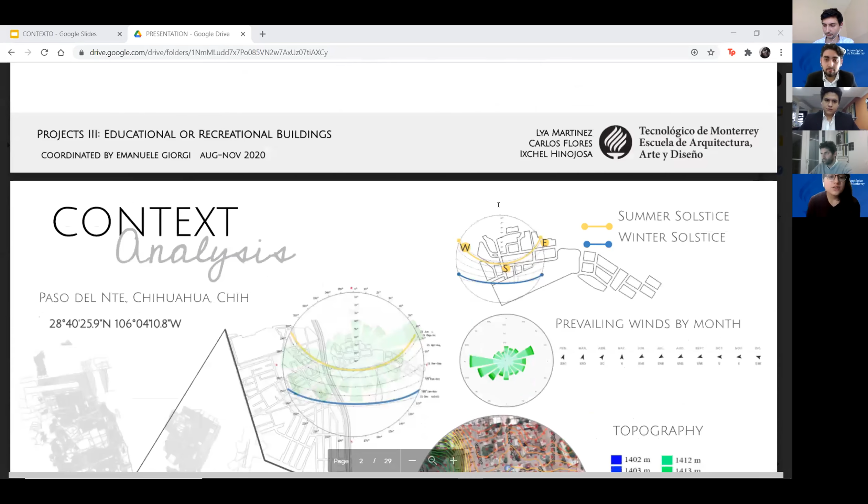The project is situated in the city located in the state of Chihuahua, which is the capital city of the state and the second most populated city. The zone we're working on is next to the Rio Sacramento, which comes from Majalca. It's spread vertically and runs parallel to the road next to the Paso del Norte. Paso del Norte is the sector we're analyzing, where the community center is going to be located.

The city of Chihuahua has main temperatures of 31 centigrade at the highest and 18 at the lowest. The prevailing winds are 17 kilometers per hour, coming from north-southwest. The topography is irregular.

It's situated in a valley next to the Cuencas de Sacramento. The most important aspect of the topography is that the sector is located in irregular topography, in a decline zone. It has approximately 30 meters from the lowest point to the highest point, where the road next to the Rio Sacramento breaks the city into the mountain sector.

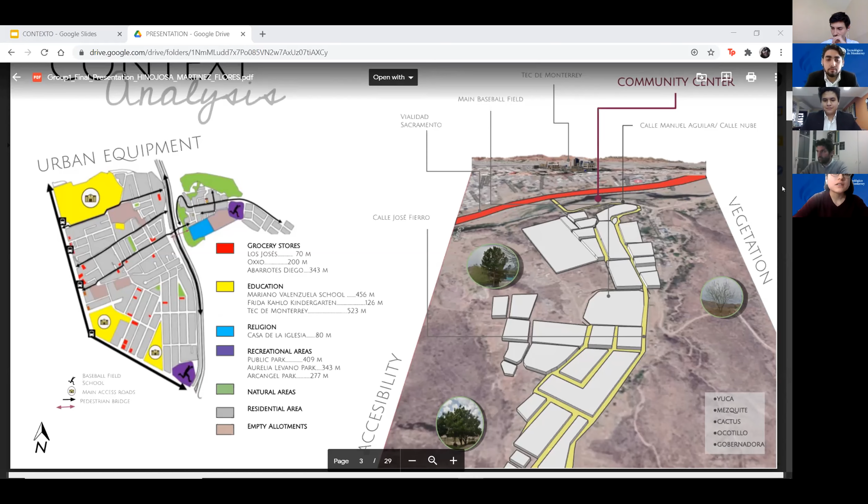We don't have many public spaces, and the one we have, the baseball field, is not very well maintained. It's located in the northern part, where the community center is going to be located.

The social composition: we have about 380 people living in the analysis area, which is bigger than what I stated before, because it's not formally delimited by the government, as it has been growing outside the boundaries of the registered census.

The average age of the people living there is 26 years. The average schooling years are 11. The main activity in the sector is commerce, with about 240 establishments in the sector.

The main work area is industry, Ciudad Chihuahua, mostly maquiladora workforce.

One of the things we found in the social composition is that we could define the sector as in a state of marginality, meaning it's basically excluded from the formal real estate and labor markets. So the houses there are not regulated by formal real estate, and the activities there are also not regulated by the state.

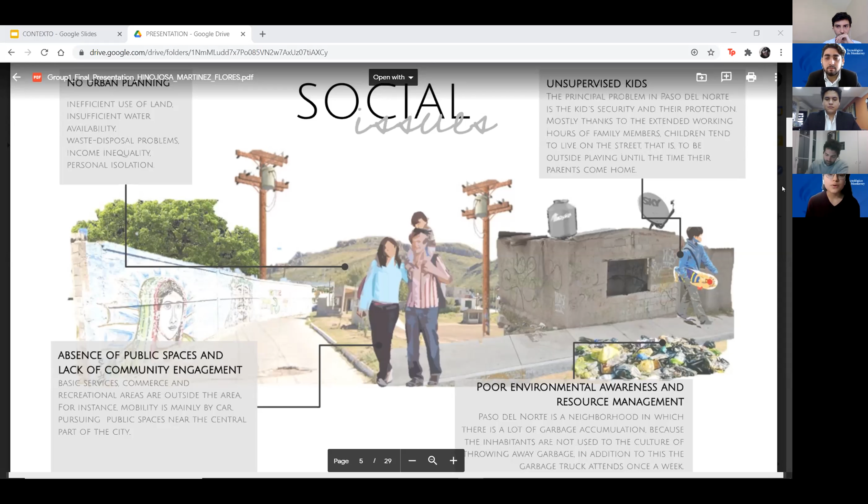There are also unsupervised kids. Mainly the people living there have jobs with extensive hours, and the kids left at home tend to be alone. So there's very poor security related to the kids in the streets or recreational zones.

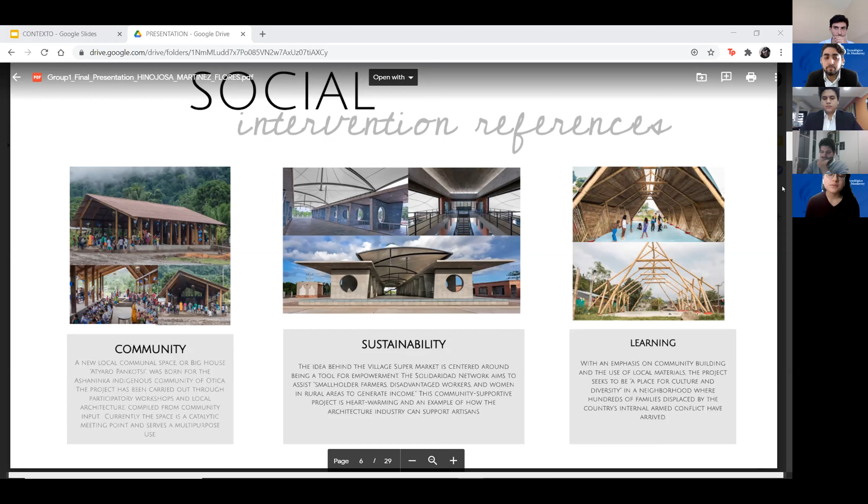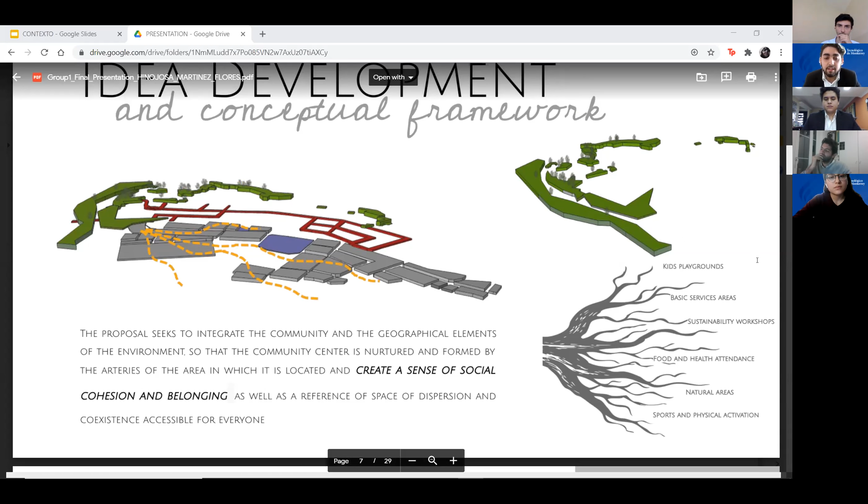Radices is our project's name. Its meaning is that in a figurative sense, the root or roots are spoken of as the idiosyncratic origin of an individual or a community.

Our concept words for our project are peaceful cohabitation, security, simplicity, green areas, harmony, open, friendly, natural, and colors.

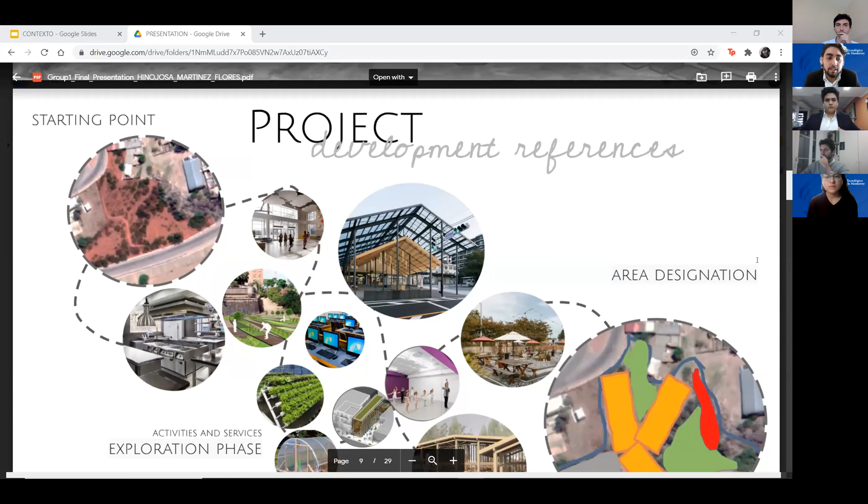Then we started designing by analyzing our terrain, our site, and what the community needed. Then we moved on to the exploration phase, where we experimented with the vegetation and materials that the community feels comfortable with and identifies with. Finally, we moved on to our design.

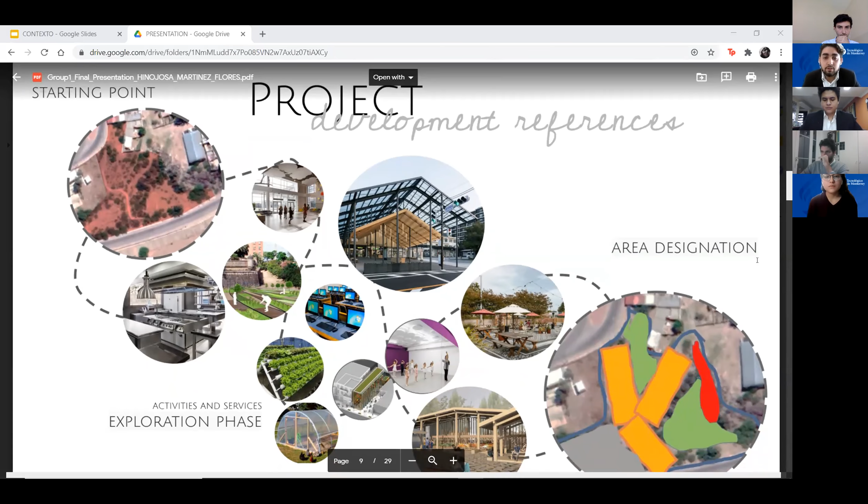What is the key of our project? We tell you that it is simplicity. We created 3 volumes that connect at a central point. The volumes were adapted to the terrain and assigned different uses.

Here we can see the green volume. There are the classrooms where kids could be learning, and here we have the workshops, the dance room, the music room, the computer room. It's like the learning building.

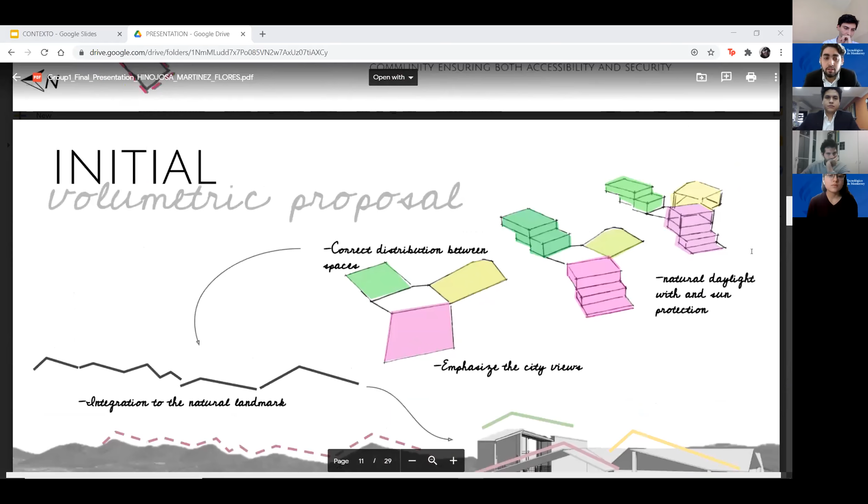Our initial volumetric proposal focused on different concepts, like the integration of the natural landmark, the city views, and the natural lighting. The project gets natural light. Here we can see an idea of the views to the city and our project.

We designed Radices to be an open space, a project that has relation with the environment and our green areas. Radices is composed of 2 buildings and 1 esplanade: one is the marketplace, the other is our educational building, and the events area, which corresponds to the esplanade.

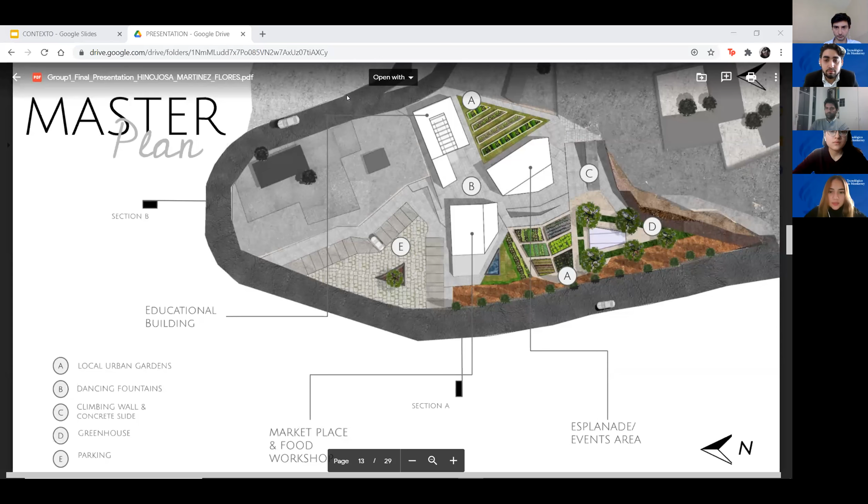In the second level, we find the workshops designed to be a creative space where the community can sew, paint, or cook, which is why it's a spacious area. In the middle we have sinks and complements like storage at the end of this floor. We also have a climbing wall at the side of our project.

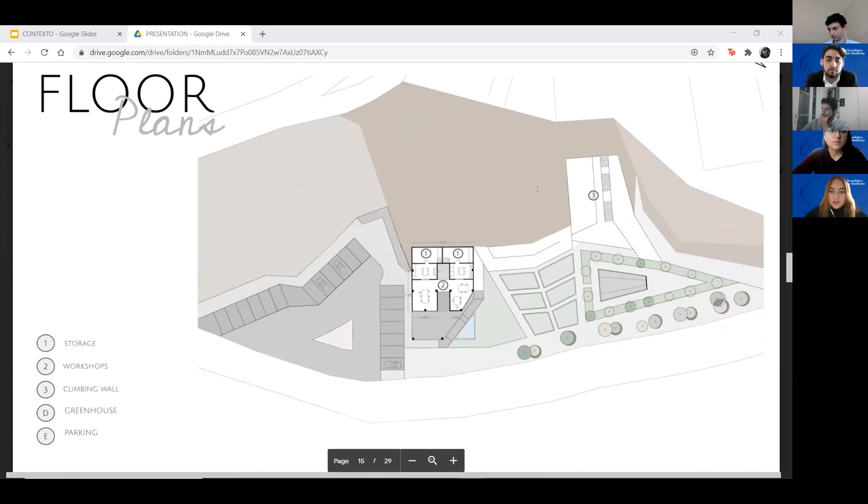In the third level, we can see the last level of the marketplace, where the community can sell or show what they made in the workshop. Therefore, it's an open area too. The third level is the most important level of Radices, because it's the union of all the project, where everything happens.

In this level, we have access to our 3 main areas. We can see the first level of the educational building, an open space that invites people to relax, and also the esplanade, which is especially thought for events, an open and spacious area that everyone in the community is allowed to use. In the fourth level, we can find the restrooms and a lending library of the educational building.

And the fifth level, we find the last floor of the educational building. That is the most important level of this building because of the classrooms designed to be a concentration space. In this level, we also have the main access from the Manuel Aguilar Street, the principal street of the community.

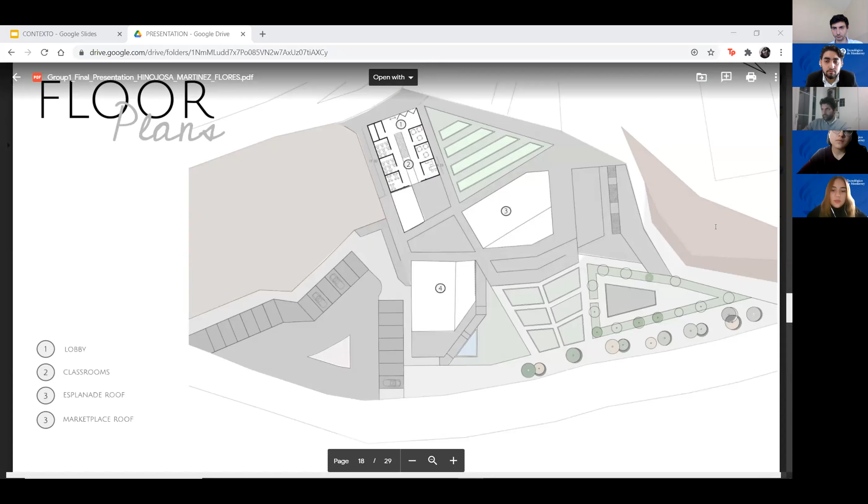Here we have the detailed plans of the three main areas. This one is of the marketplace. The next one is of the educational building, the 3 levels. And the last one is the esplanade.

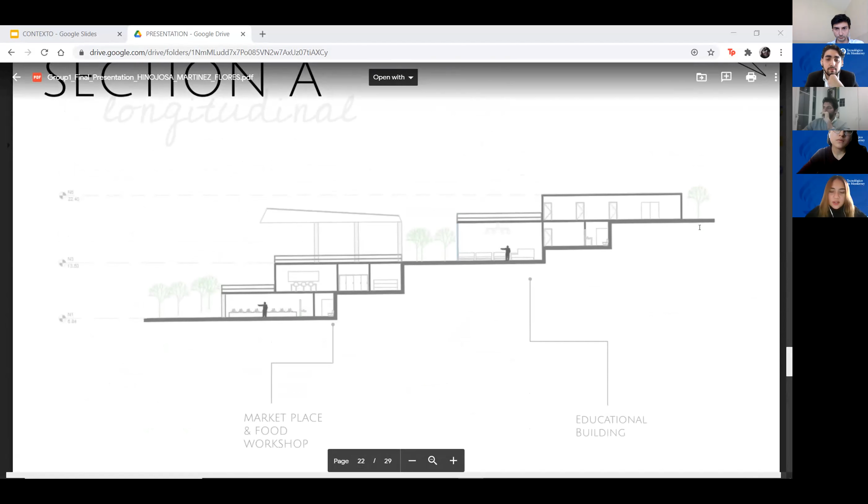Next, please. In this section, we have information of the marketplace and the educational building. As you can see, there are some similarities on the design of the levels. They both have a terrace, which is an important feature of Radices. And here we can see the level that connects both, that is the 3rd level.

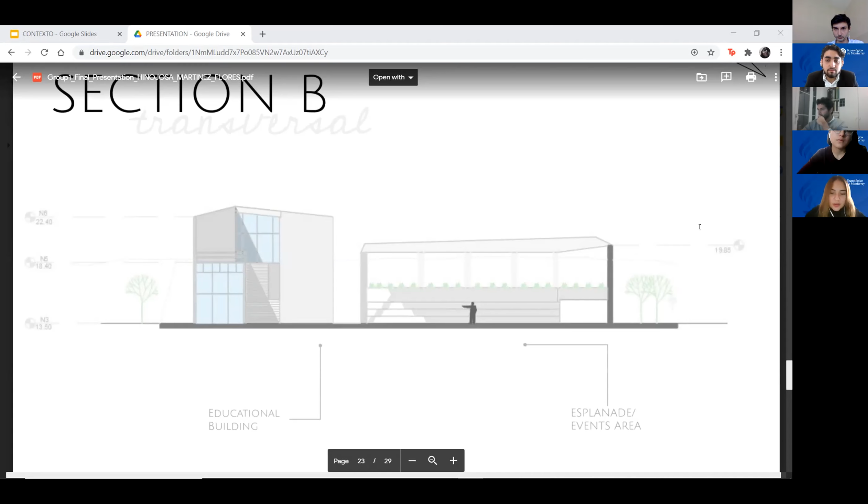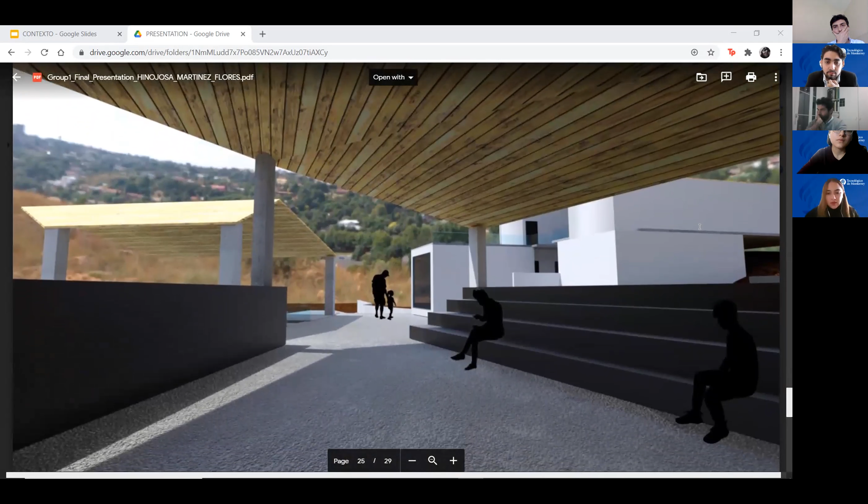Here is the esplanade, the educational building, and the marketplace. And we have the front view of our project.

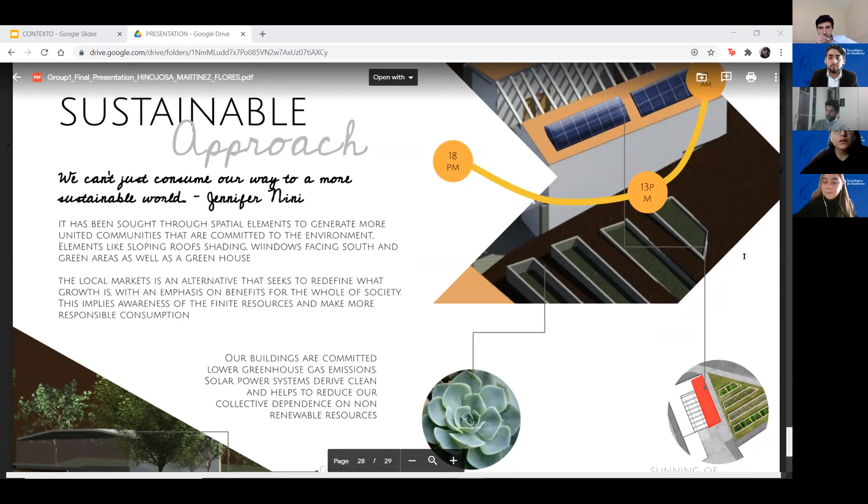And last, our sustainable approach. We based our project in the sustainability of circular commerce, so you can grow your own fruits or vegetables in the urban market and the urban growth, and then sell it at the market. We implemented solar panels and a greenhouse. All the plants we want to implement are endemic and useful to the community. We have sloping roofs, shading, and windows facing south, as well as a lot of green areas.

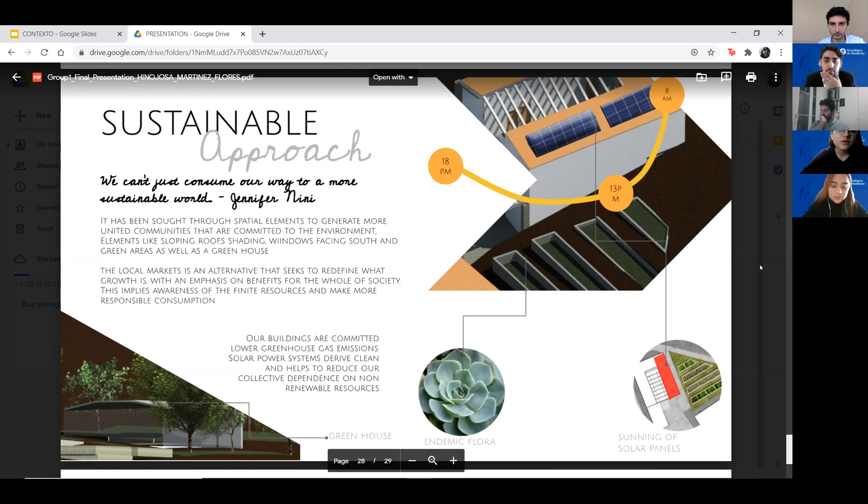Thank you. Okay, thank you. You spoke too much because we are at 18 minutes, but okay. I'm sorry, it's the nerves of being the first one.

Agustin, Giorgio, do you have any question for this group, or we can go to the second group?

Just very quick, I think — if I'm not wrong, all the projects are in the same site or different sites? All in the same site, same community. Okay, so all the introduction of the natural elements like the sun and wind and these kinds of things, maybe we can go quicker in the next presentations, since we don't need to hear it again six times. Definitely. Yeah, okay, that's good.

Perfect, so we can go to the second group, or any other comments? Okay.

Just a suggestion: I'd try to work better with the cover of the building, with the landscape and the city. So not this flat roof, but maybe you can work with another type of this cover — the roof. Understand? Do you want to reply? So just a suggestion about the cover of the building. Maybe work better with the shape of this roof, to give more connection between the building and the landscape, the building and the city, the building and the public space. Because it's not a simple shape of roof that could work better with this type of project. So you mean the roof could be used better, like extending the public space, so you can access these roofs instead of having the pitch roof typology — not a simple roof, but maybe a shape that connects better the landscape, the building, and the public space. Just a suggestion.

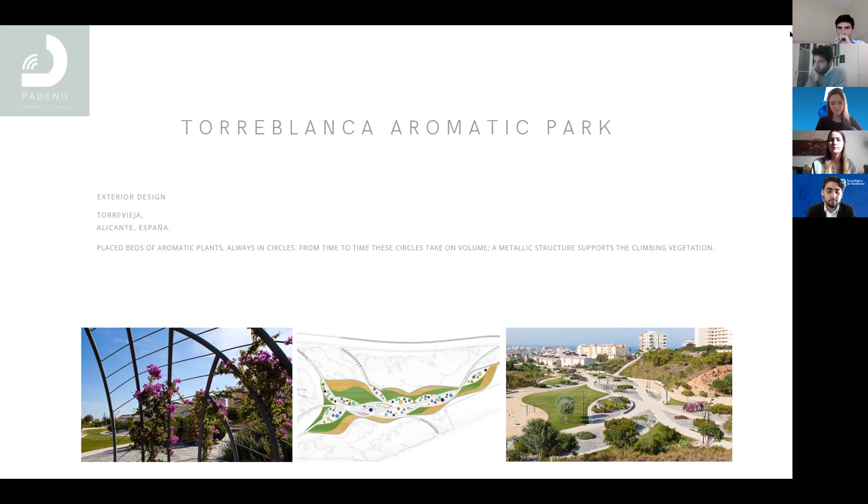Next, we're going to talk about permaculture. It is a practical method of creating sustainable ways of living - a conscious design and maintenance of agriculturally productive ecosystems.

In this community, we have to accomplish the following specifications: low maintenance, full sun exposure, and low and occasional watering.

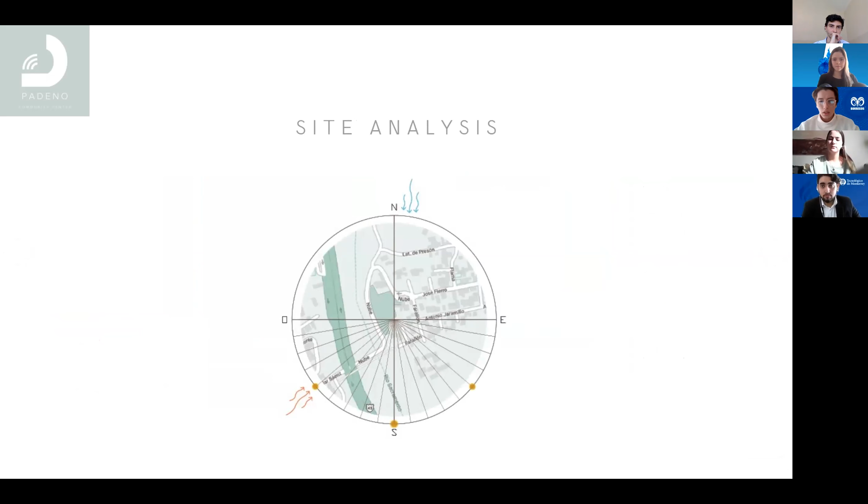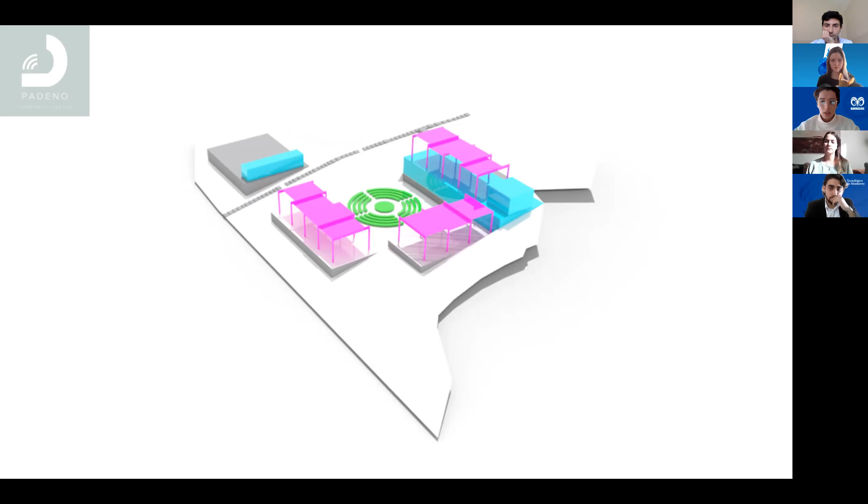Next, now we have the diagrams for the ceilings. What we wanted to achieve is a space that can change according to the needs of the community, the time, and the budget. So we proposed these roofs in which the community can create movable spaces according to their activities.

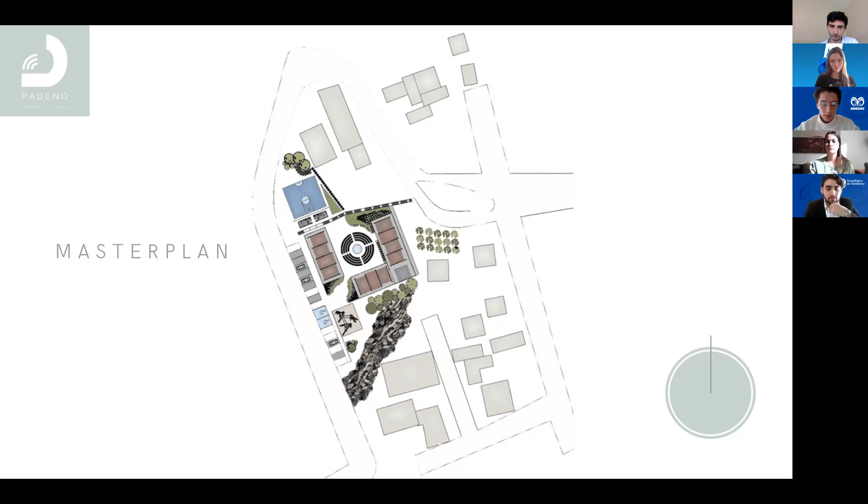Then we have the floor plan, where we can see the distribution of the proposed spaces. First, in the center of the site, we have the production area. Around it, we have the library, computer center, and cafeteria. Then an esplanade with the first roof, where they can make these movable spaces. Then we have a playground, another roof, and some bathrooms and a sport court. On the right side, we have trees also for production.

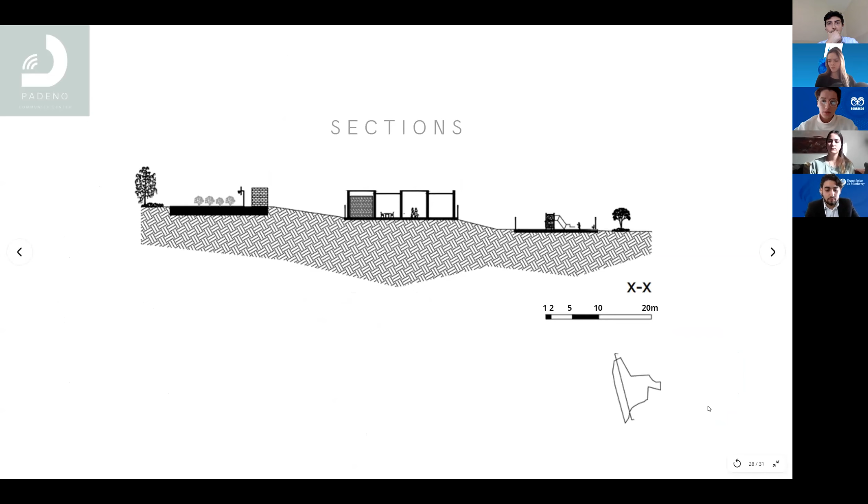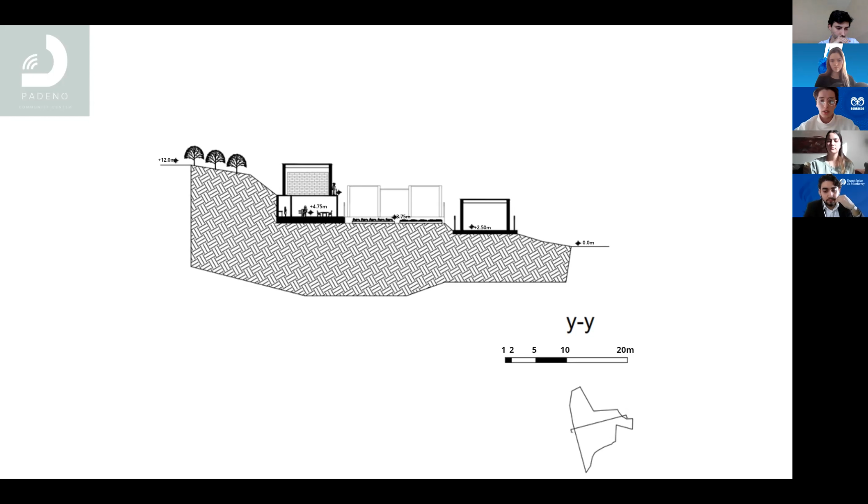Next, we have the sections where we can observe the topography and the levels of the spaces, which were one of our biggest challenges. Here we can also see how above the cafeteria we have a terrace and some restrooms, from which we can get a view of the whole city.

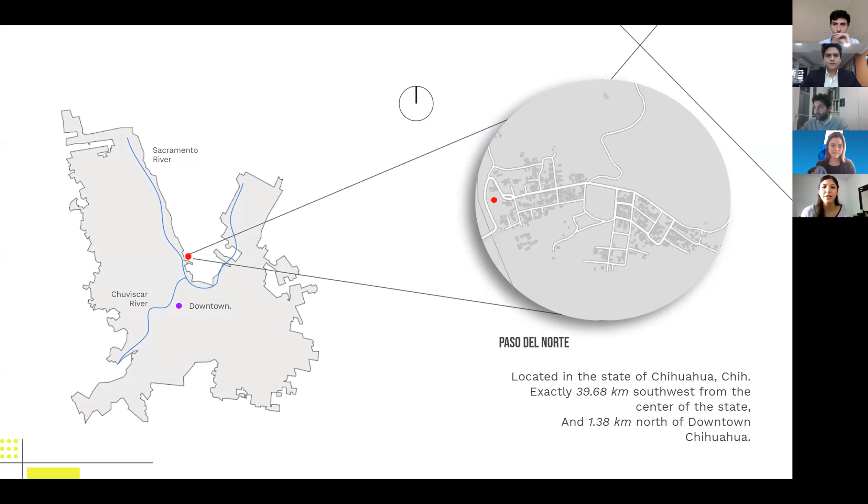The site is located in the city of Chihuahua, Chihuahua, in the neighborhood of El Paso del Norte, where the Sacramento River passes nearby. This community is also about 1.38 kilometers north of downtown, which is near the Chuviscar River.

On the left, there are some stairs that were built before the bridge, and they are still being used by some people in the community. On the other side is the pedestrian bridge, which is 146 meters long, that can be difficult to climb due to the rise of the stairs.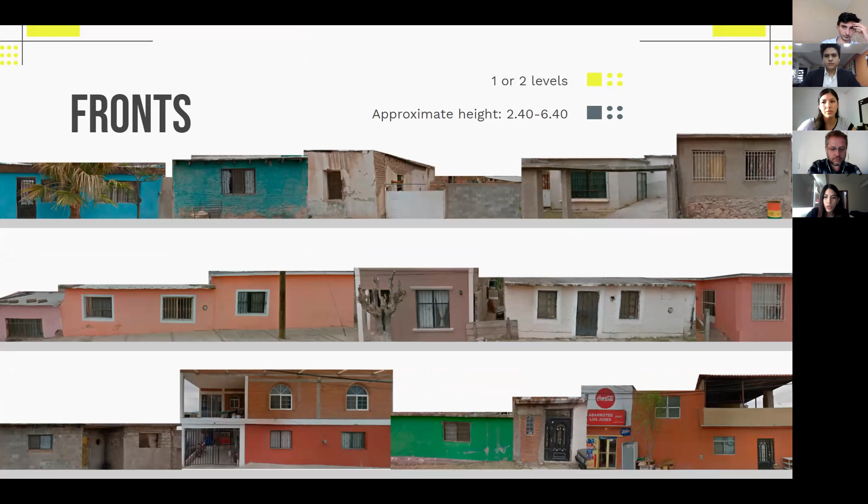Since the community doesn't have a defined architectural style yet, we decided to analyze the closest site to the community, and we found 4 main things. The first is an indifference to the context, from the finish of the buildings like color or materials to the ceilings. Secondly, there are impractical designs—some buildings obstruct public spaces or have spaces that can't be used. Also, there's a lot of vegetation in the zone, covering most of the street. And last but not least, security—there are a lot of fences on the fronts or windows, denoting the insecurity in the area.

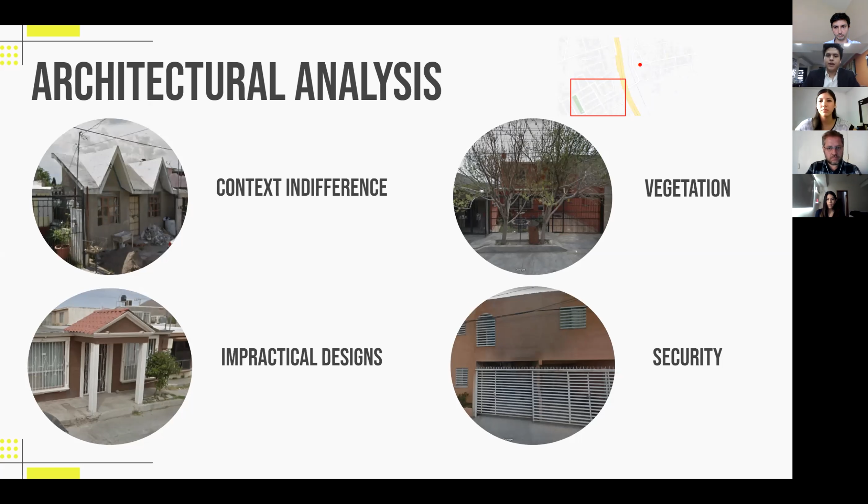We analyzed the distances to the nearest places like schools, grocery stores, parks, and other businesses, and found that there are no real hospitals close—just a care center, but for more complex health issues, the closest hospital is 4 kilometers away. Also, the quality and quantity of parks or other spaces are low, having rust, swings, or benches in bad condition. There are a lot of schools from elementary to universities, like the Tec de Monterrey or the Normal School of Chihuahua State. And there is a lack of businesses in the area, having mostly grocery stores only.

We analyzed the community and determined these aspects in the social context. The kids play in the streets all day while their parents work, so they are exposed to violence. They demand a lot of attention, and they have poor education.

We also analyzed the problem of ecology. The streets are full of trash. The kids do not have the culture of throwing away the things they finished. Also, when some furniture becomes obsolete, they leave it on the street and garbage accumulates on top. The open areas that should be used for recreation are full of garbage too.

Taking into account the problems mentioned, we propose some solutions: build a safe meeting point for the kids, have a place where kids can have access to books, chess, and board games, promote the value of education, promote environmental care, and place organic and inorganic waste containers.

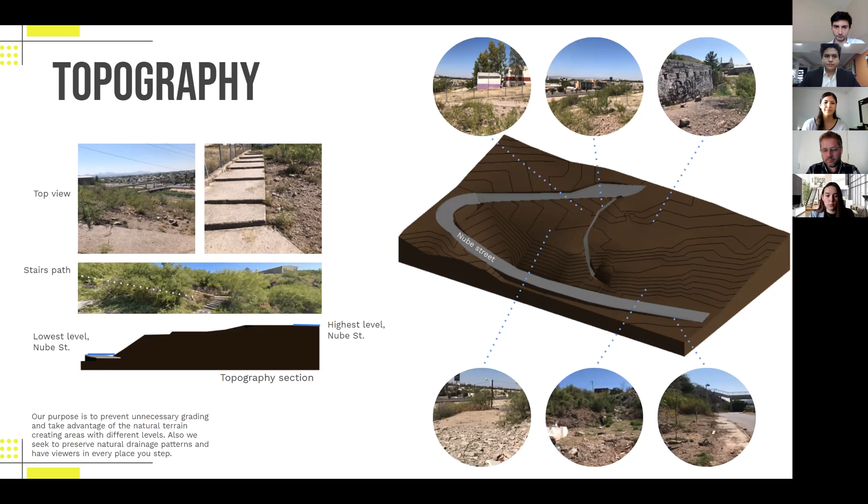Solar radiation, both in summer and winter, will infiltrate more in facades facing west.

Here we have some views of the site. On the top left corner, we have the view from the main street, Vialidad Sacramento. On the top right corner, we have the view from the sidewalk, where the main access to the community is. Below that is the view from inside the community. The bottom of the slide has the views from inside the site. On the left, we have the south view. In the center, we have the west and southwest view, and the north on the right.

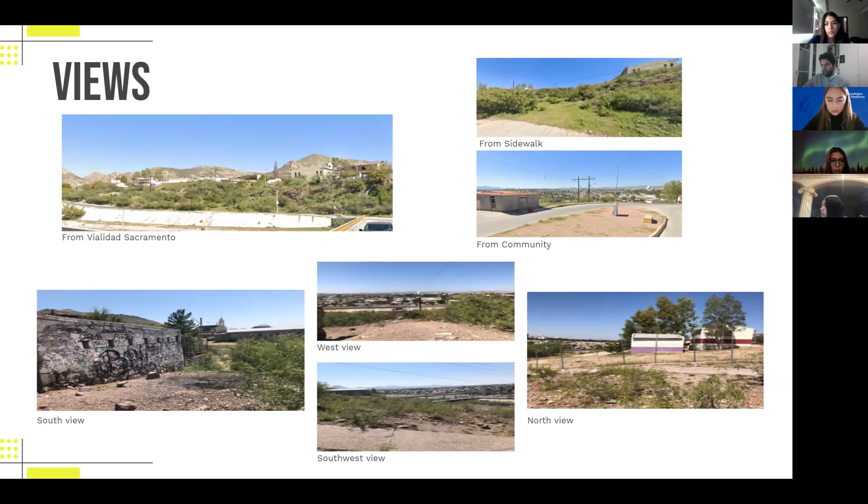We looked for successful projects that had the same elements we looked for in our project, and we found this kindergarten in Guadalajara that has implemented a sensory and dynamic education that makes children see learning in a fun way.

When we were analyzing the project, we identified different materials that we would like to implement in our project, like concrete, because of its natural look and low maintenance needs; white paint because of its neutral color; wood because it brings a warmer look; brick because it's a cheap material and makes a contrast with the other materials; colored fence because it's attractive; and bottle tops.

This is one of the elements we like the most because it invites the community to participate in the decoration of the site and also invites them to recycle.

We also analyzed the spaces we wanted to incorporate into our project, like the kitchen, the terrace, the outdoor classroom, a multi-use room, and a garden.

Our goal with this project is to rethink community. Community has been thought of as knowing your neighbors or just living near others. But our idea of community is getting involved with it in all aspects that affect human beings, such as education, entertainment, interaction with others, recreation, and health.

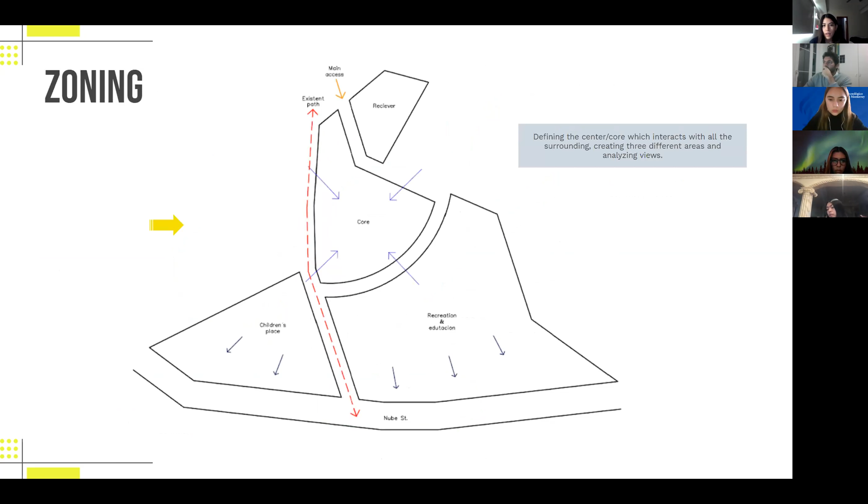This is how we divided the site, firstly by respecting the existing path. Then the core of the building and the receiver were defined, along with analyzing some views. Finally, this is how we zoned the areas previously mentioned, creating interesting circulations for walking or even riding a bike, while also adding a green barrier for protection towards the city and the street.

Going through the main axis, we find the first volume seen from the street: the cafeteria. Then, some steps down, is the biggest and most important volume of the project, the meeting point, connected with all the other volumes. Here kids can play freely and safely since it has no contact with the streets, while teens and adults can enjoy the area with benches and a cycling path, watching their children.

Two steps up is located the viewer, above the volume of the rooms. Next, one level down and on the other side of the path, is the playground volume, where people can play any sport. Finally, the lowest volume is the green one, the cultivation garden.

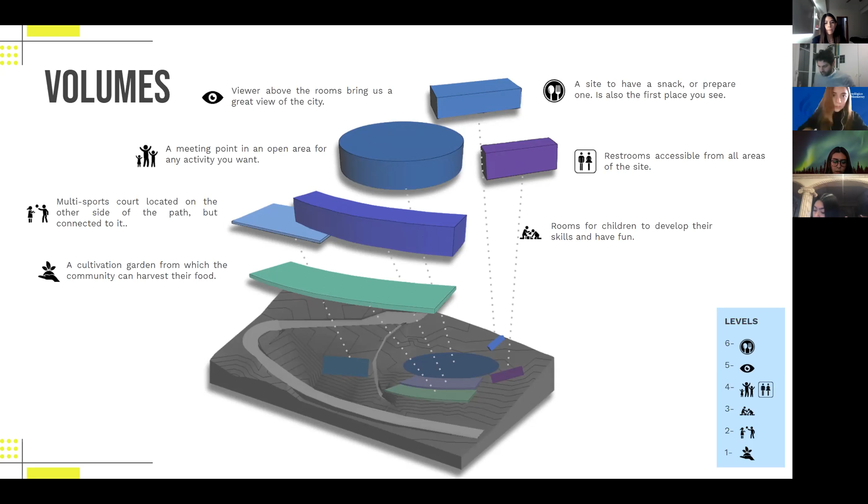The first diagram represents the outdoor space, creating a comfortable climate for outdoor activities through a semi-exposed space where wind can flow freely. The second diagram shows how we respected the natural surface of the site by designing a multi-layer project. The third represents how the classroom windows allow natural light in, along with light entering through the door—elements that help save electricity.

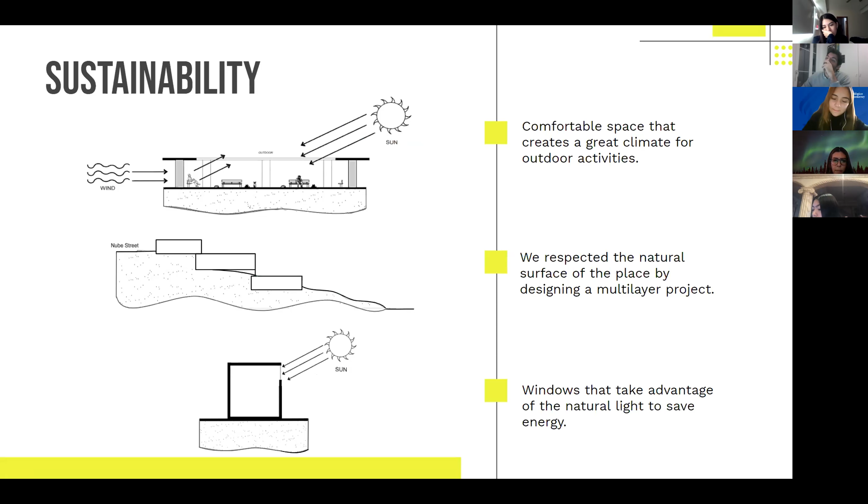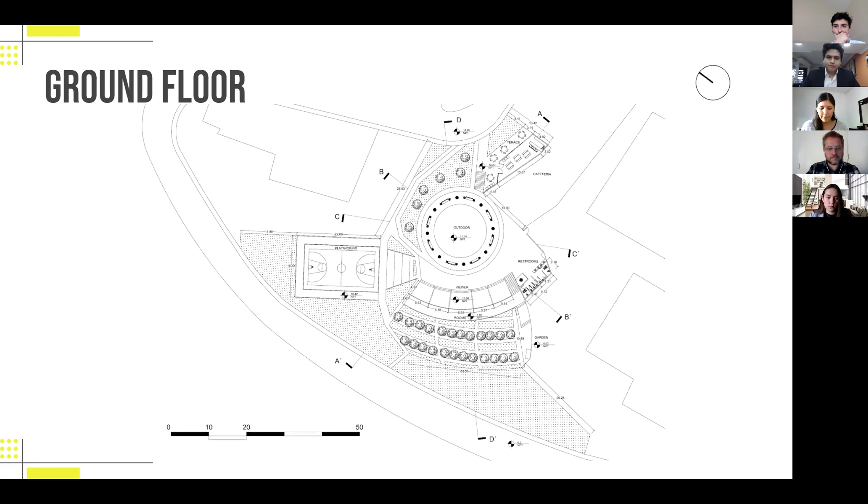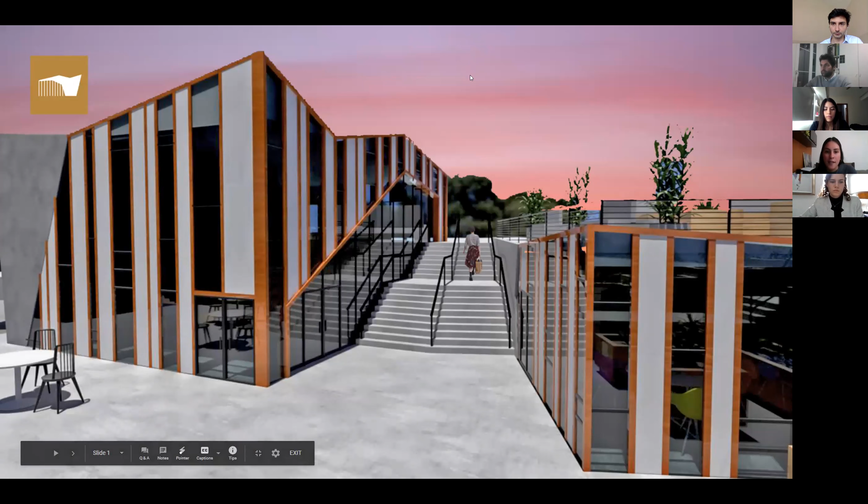We are all in our 5th semester of architecture school, and we're here today to present our project for the recreational center located in the community here in Chihuahua.

Paso del Norte is a community located on the outskirts of the city of Chihuahua, right below the mountain range that limits the city naturally. Between it and the community lies the Sacramento River, which acts as a natural border between them. Due to this and its poverty-related issues, the people living in Paso del Norte suffer from poor quality of life conditions and social disintegration, making it a very vulnerable community.

The project consists of a center, either recreational or educational, which provides a safe, entertaining, and healthy environment for children.

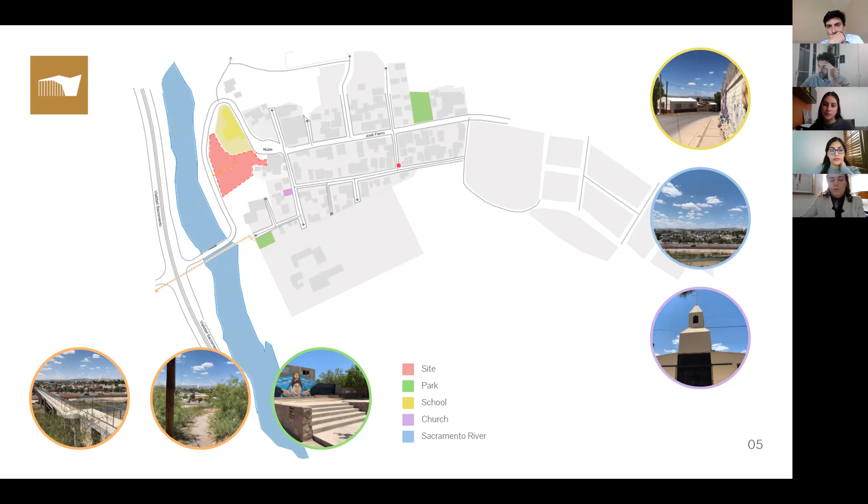The parks have a pretty big lack of shade, and the high temperatures of Chihuahua make it impossible to endure the heat for children to play outside and ride their bikes. We can also identify the Sacramento River and Vialidad Sacramento, which, as my colleagues have mentioned, separates the city from the community. So these are all very important elements to consider in the context.

Right here we have the images: the two above show the view from the city standing on site, a view which the project is able to really benefit from, and these two below show the view towards the mountain range. The view towards the city is completely opposite to the one towards the mountain range.

Most houses in the community are self-built. Some are well-maintained, but others seem to be in a bad state, meaning inhabitants may live under very hard conditions due to the lack of architectural planning, design, and color. Houses vary in color, size, and style. Most are one story high. People work on them, expand them, and try to improve their homes as they go along.

As we have already mentioned, the community is vulnerable to poor quality of life conditions. The socioeconomic level of the Paso del Norte community is very low. People here have limited job opportunities, meaning the jobs they do have are poor quality jobs. The pay is not good enough, which can only lead to low-income households and poor quality healthcare and services.

Aside from this, parents must travel long distances to get to work, leaving their children unsupervised all day, with the liberty to educate themselves in whichever way pleases them. So it's expected for them to develop unhealthy habits and relationships because of the lack of responsibilities and a safe environment.

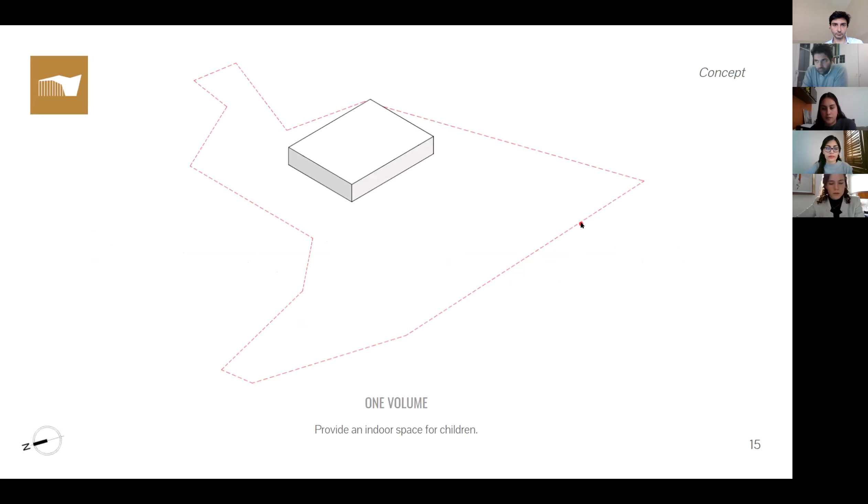So the project started off as one volume. Then it became two separate ones to provide a space for educational use and another for recreational and cultural activities.

The main building was drawn up to allow for a stadium-like auditorium to be put in place and to widen the view towards the city, like creating a framing of a picture.

These two buildings were then rotated for them to run parallel with the polygon's limits and to create a circulation between them that widens as it goes and opens up the view.

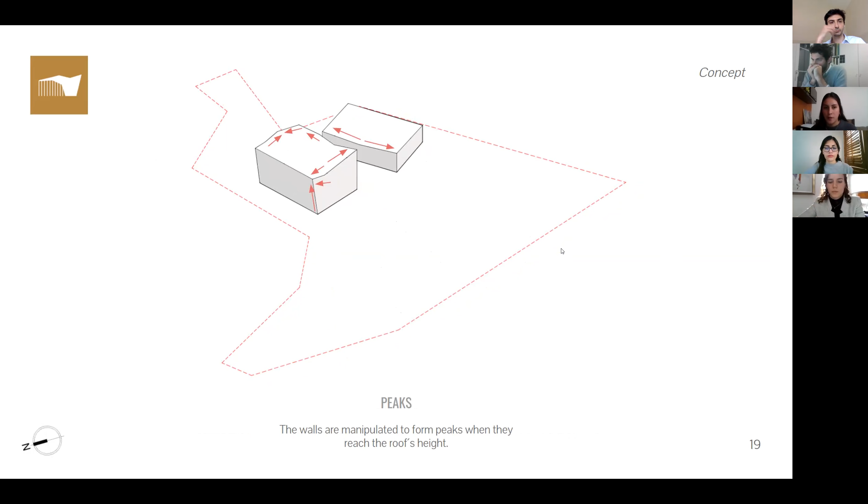The slopes surrounding the site inspired the peaks created with the walls of the buildings.

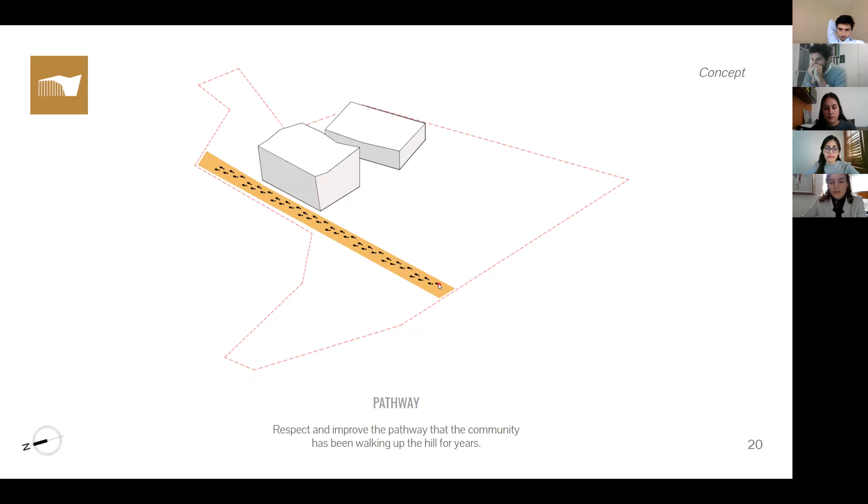The pathway here is self-made by the community, and they use it pretty much every day of their lives. So we intend to respect it, not only to respect it, but to improve it too.

The complex has two main levels, which is street level and the one where both buildings come to an end. These two main levels, we think, are the ones that may provide this green area and a skate park.

The area where kids may ride their bikes all day long, for runners, people who exercise, or just for the gathering of the community.

The one on the left side is a stadium-like auditorium that has its main access on the top floor and descends with the natural slope of the terrain.

The level at which the stairs land is a multi-purpose space allowing for grand lessons, talks, speeches, and visits to take place, and for all to gather around.

The building on the right is one floor only and serves as a classroom, and provides the space needed for restrooms.

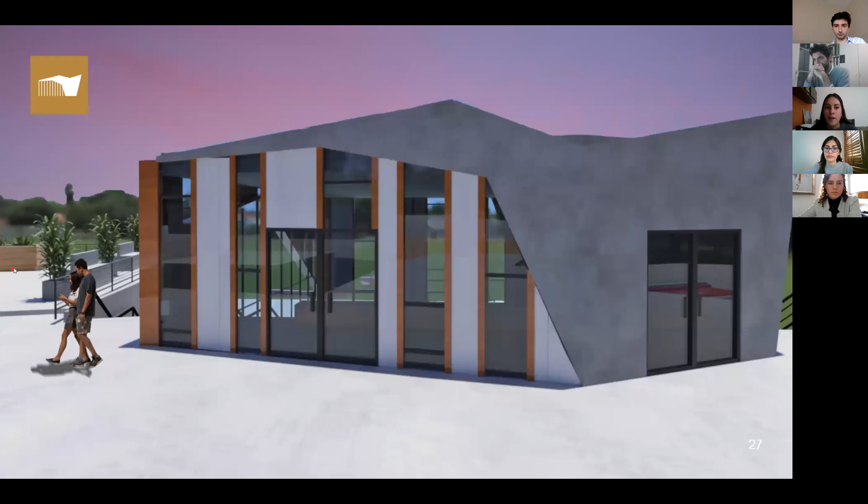This building's roof is actually a terrace that connects the two main levels of the complex. Both buildings open up to the main area, the outdoors, where children and young adults are able to ride their bikes, hang out, exhibit self-made art, and exercise.

This is a multi-use space, designed for them to have a space of their own that they feel a part of.

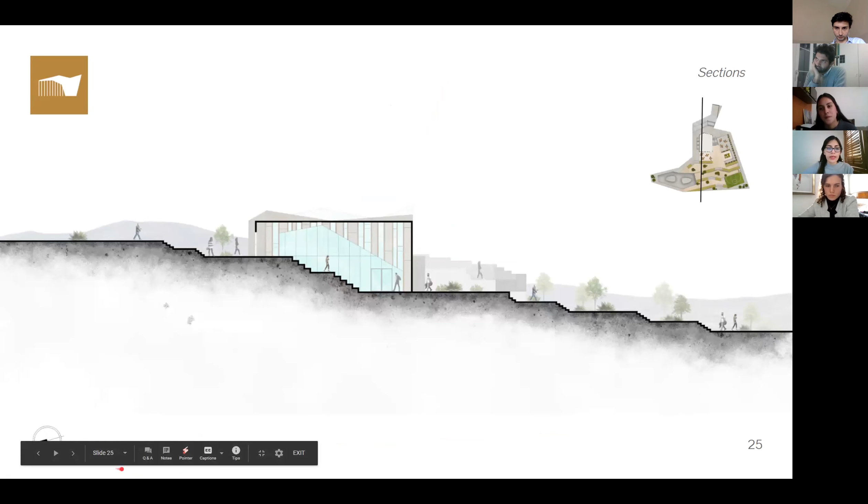In this second section, both buildings are shown. It allows us to identify the main entrance, located at street level, and how it brings you almost forcefully to where all the activities gather to create a space full of diversity.

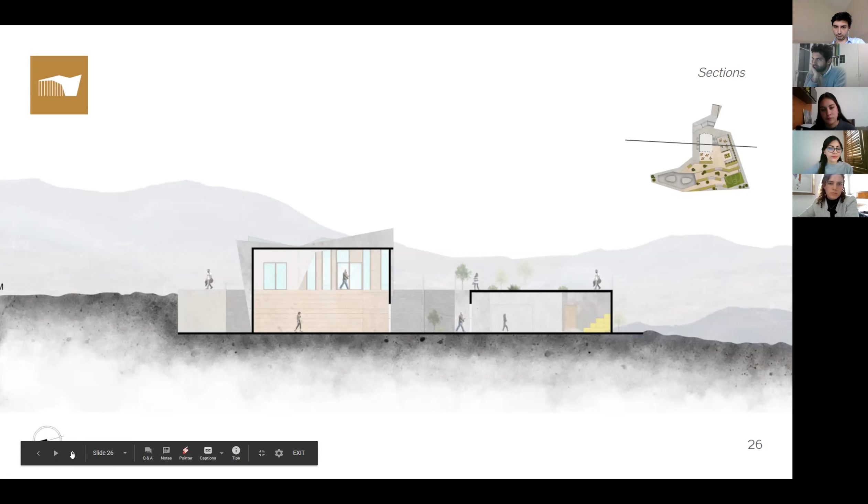This right here is our main entrance at street level. This one oversees the main road.

This right here could be said to be the back of the building, but this facade is the one overlooking the city.

It allows all of these sites, these places, these areas, for a long circulation, a running circulation.

As you may see here, the roof terrace allows for the street level, the ground level, to come to all of these levels right here.

In which vegetation happens, ramps happen, stairs happen, the field, this court happens, and the skate park happens too.

These right here are the two main buildings. As you may see, one is higher than the other because of the stadium-like form. This one to your right is the classroom and the restrooms.

This right here is the auditorium — sorry, this is the main entrance, and it brings you towards the main area of the whole community center. This right here is the classroom.

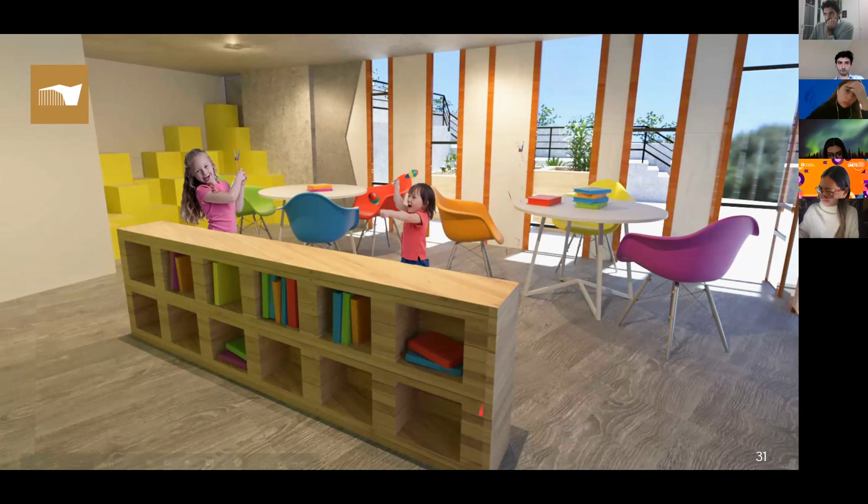I want to start again quickly.

In general, I find it very interesting, very nice, and very consistent narrative with the graphics you were showing, like the diagrams, the images, and all these renderings. I like it a lot. I think it's a very nice project. In my opinion, it's too much concrete, but still it's a very nice way how you terrace. I will use concrete only when it's absolutely necessary, and the rest I will try to work with landscape, more low maintenance vegetation from the region that you don't have to maintain. But in general, I like it a lot. The geometry of the buildings is very nice, how the dialogue between the volumes is really nice too. The scale, etc. Congratulations, it's a very nice project.

Thank you. We appreciate it.

Yes, I agree with Agustin about the terrace, because I think that you can work with more vegetation, more green, because the green helps you manage this space in a better way, and also to have a sort of hierarchy about your path, about the main path that goes inside your building, as a core about the surrounding. So two things: you have to have a main path and the other path that goes to the center of your area, and be careful about the facade because maybe it's too glassy, the opposite of too concrete outside. Manage this glass in a better design, just for this image, for this render, for example, because it seems that you work with a structure and the door and other things going in another direction about the structure and about the design of the facade.

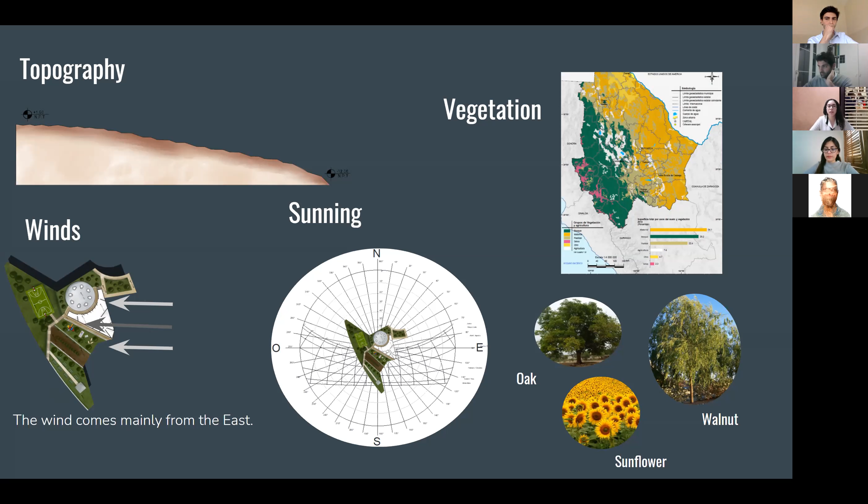First of all, we have the topography, in which we have the highest and the lowest level with a difference of 14 meters. On the ground, the wind comes mainly from the east, and we looked at the orientation of the sun, which helped us design the roof and the windows in our building.

Some of the relevant areas near the ground are the kindergarten, the church, the house of the church, and the baseball field. The main pedestrian route goes through the site, and here we have a simple map that shows how these areas relate to the ground.

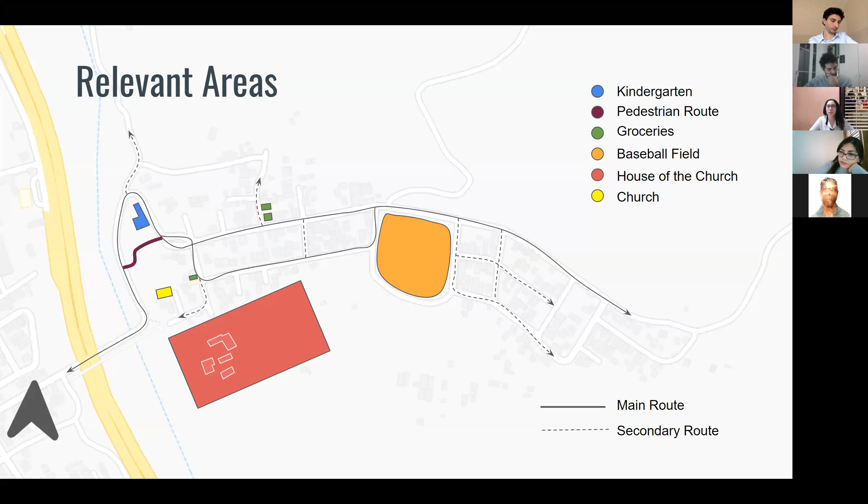From the ground, we can see the horizon of the city, and from the other side, we are able to see the kindergarten.

Around 1,791 people live in the zone, and one of every 3 people is less than 15 years old.

The social problems that we found in the community are pollution and trash. The children don't have a daycare. They have gastrointestinal diseases from contaminated water and bad smell in the area.

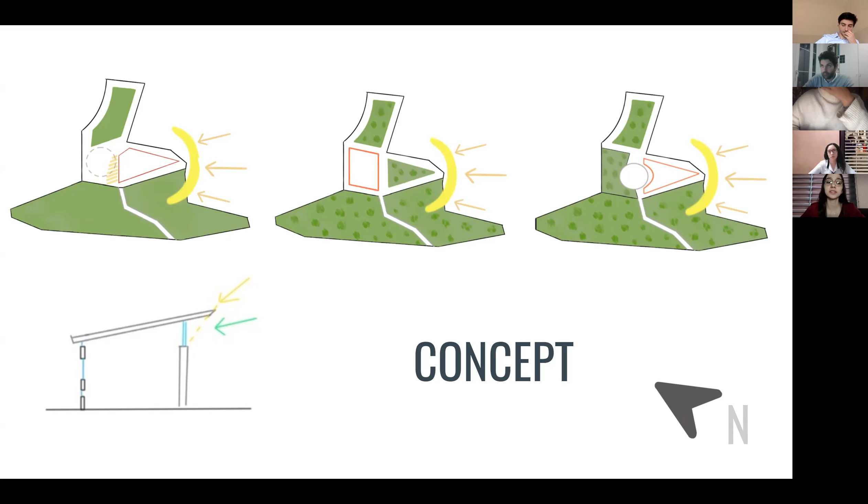We made some sketches that helped us create the main idea of the building and have a concrete idea about the roof. We maintain the pedestrian route and make it pass through the main open common area.

The coexistence space is a room where people can hang out in the interior of the building. The workshop rooms are 4 areas where different activities can be held. They adapt to the requirements of the activity.

The reading room is a space designated to read or to rest. People have access to different types of books so they can choose their favorite. The warehouse is a space where things that are not being used are stored.

The sport field is a court suitable for different sports where people can enjoy playing what they prefer. Also, we have a playground where kids can go play with different playing equipment while their parents supervise them. The conference room is adequate for different types of conferences, and we also have 2 bathrooms where only people that attend the center can have access.

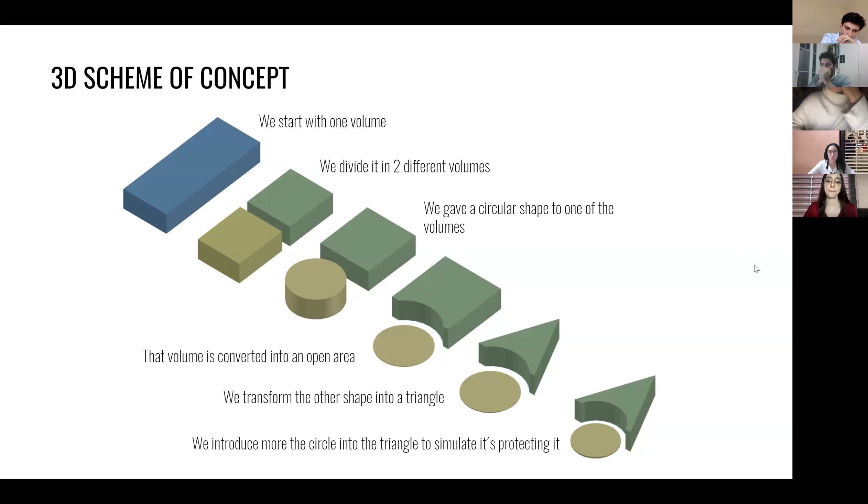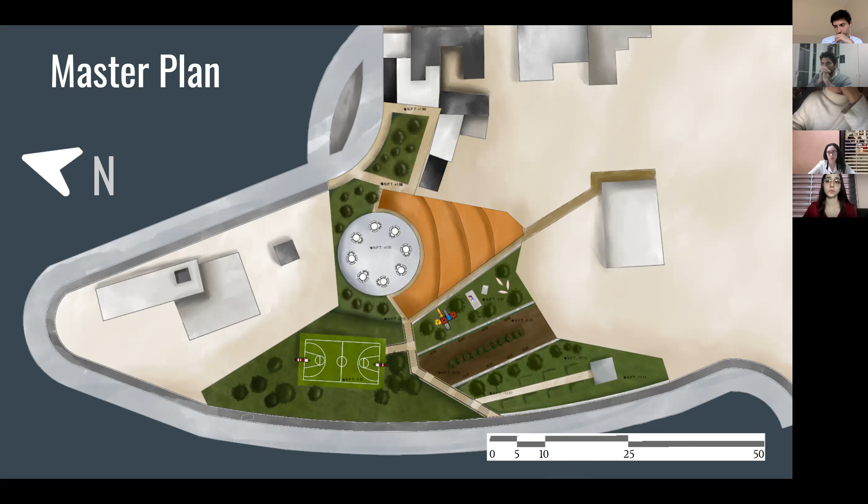This is a master plan where we can see the relation between the site and the context. And here are the locations of the main areas in the ground and the relation between them.

We decided to put the workshops on the edges of the building to help the parents take care of their children and see them while they are in the open area.

The library is near the common area, but it's isolated from the outside to maintain a peaceful place to read. Two other workshops are in the middle of the building next to the conference room, with the bathrooms and warehouse at the end of the building.

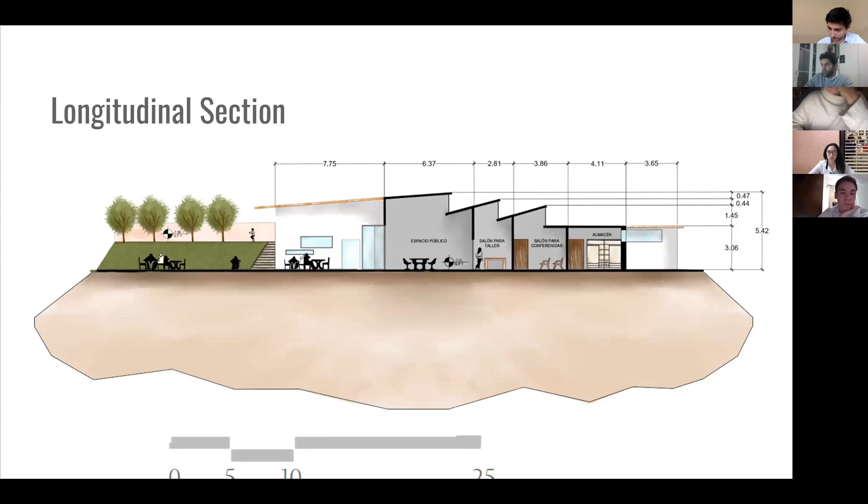Here we can appreciate the difference of the levels throughout the ground, and you can see the open area, which is where the people are coexisting.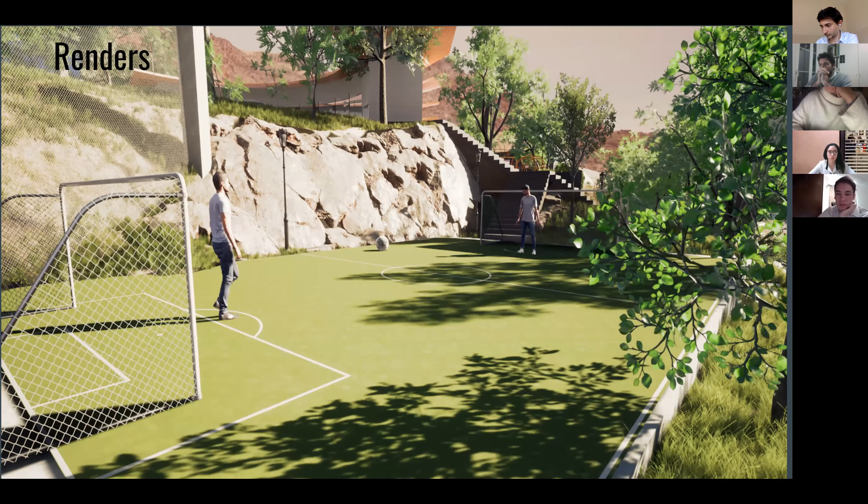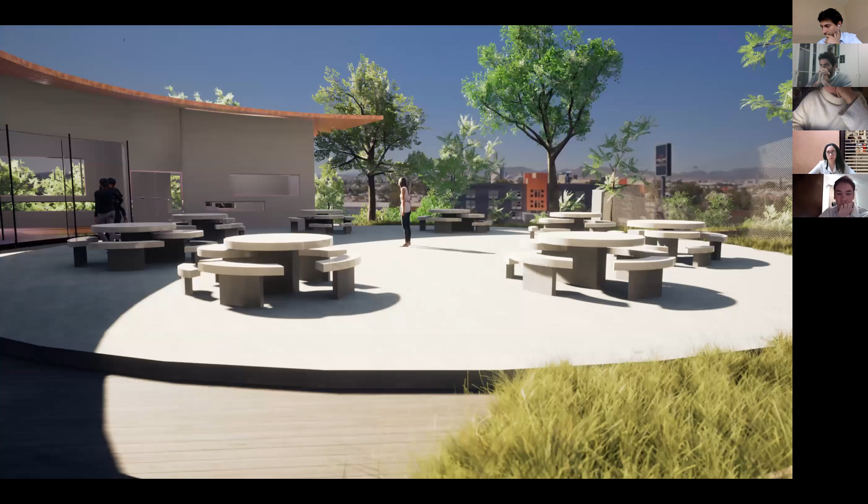There are some different levels in the ground. And here we can appreciate more the common area that we have, with all the tables, and a more open area at the middle of the circle.

This is a playground, and it's next to the building to be able to watch the kids playing while their parents are inside of the building.

The orchard has multiple places to cultivate different plants, and it is at the lower level of the site.

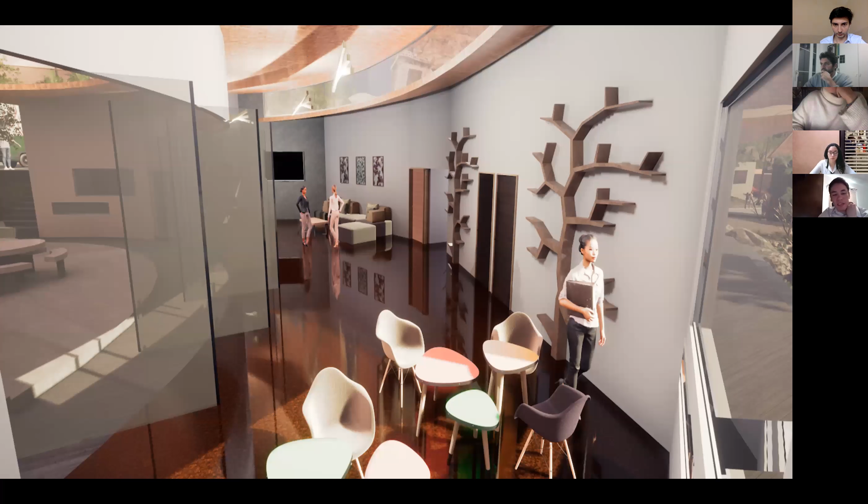And here we can see the common area that's inside of the building and how to go into the different spaces.

And finally, we made a short video of how these places will be seen.

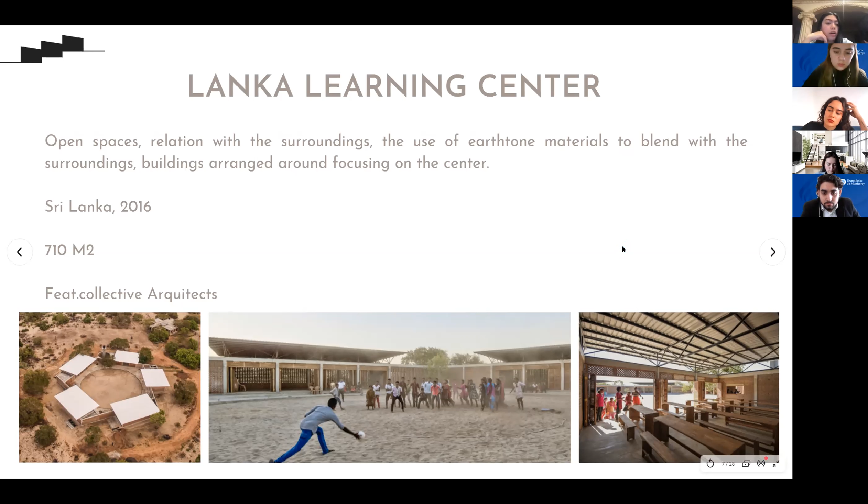Another one is the Lanka Learning Center. It's in Sri Lanka and was built in 2016. We found inspiration in this project because of the open spaces, the relation with the surroundings, the use of earth-tone materials to blend with the surroundings, and because the buildings are arranged focusing on the center. It's 710 square meters, and it was built by Feat.collective Architects.

The project, the neighborhood Del Paso del Norte, is 39.68 kilometers south from the geographical center of the state of Chihuahua, and 1.38 kilometers north from downtown Chihuahua.

The project specifications: first, the location is in Paso del Norte, Chihuahua, Chihuahua. Second, the land is 4,000 square meters. The surroundings include stores, pharmacies, parks, schools, factories, and churches. On the ground floor, we have a maximum slope of 61.3% and an average slope of 1.3%.

One of our more important subjects was sustainability, so we decided to add a permaculture garden, which can be defined as the growth of self-sustaining agricultural ecosystems by taking nature into account, creating synergetic farming systems, considering the environmental conditions, and using them to our crops' advantage and ours. The considerations for the plants we put in our permaculture garden are diversity, resilience, natural productivity, sustainability, and maintenance.

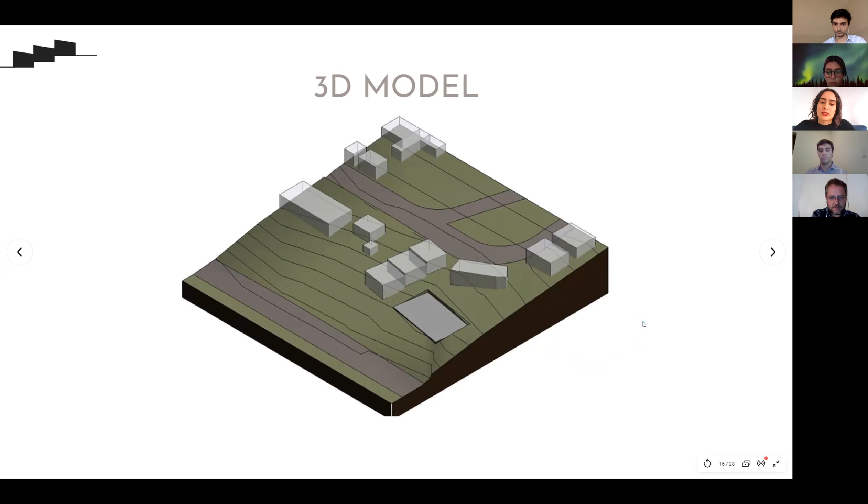The volume on the right, we decided to place following the path where pedestrians would be walking, to cause the feeling of openness and security, since it would be a place commonly used. We then divided it into 3 volumes to follow the slope, respecting the hill and integrating the building into the natural view of the hill.

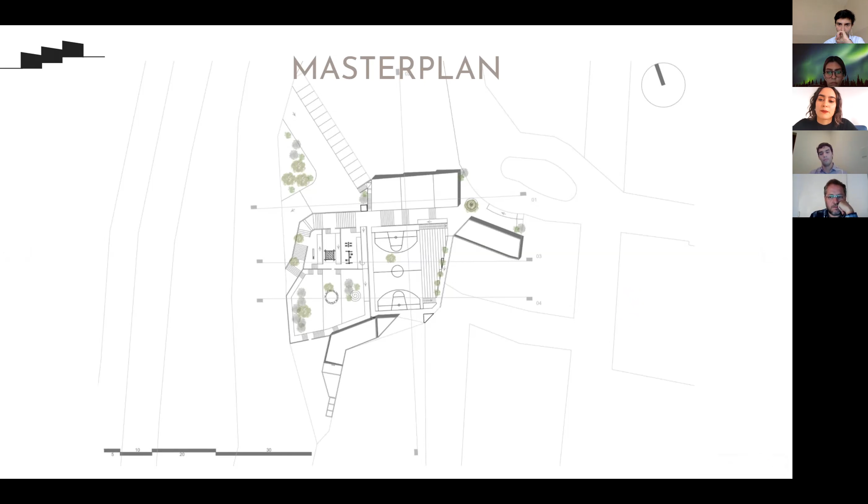To the north, we placed a parking lot for people coming to visit, and we thought it would be an ideal place to put an elevator, even though we know it would be in a later development of the project. But we thought this would be important to make the project more accessible, so people with a disability can access their car and reach the main area by the elevator.

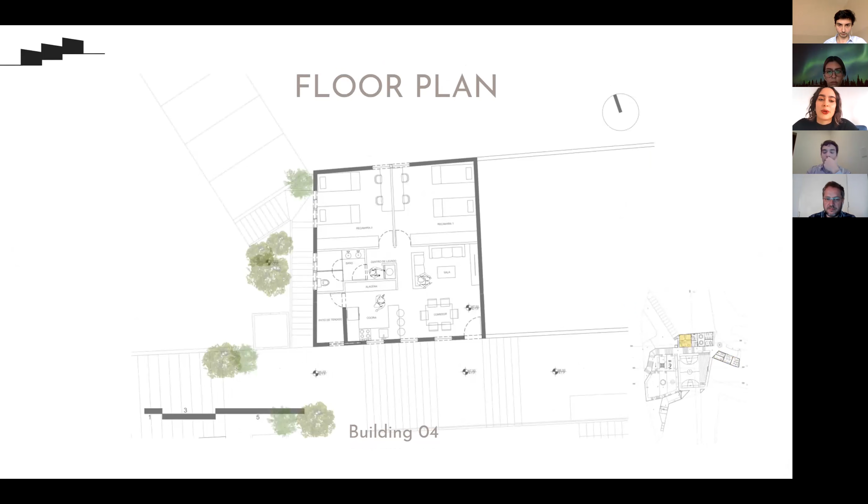Next we come to the living area. A problem in the community is that there are inhabitants who find themselves in situations of homelessness, and they live with their family members. This can create problems, and a lot of families can be living in very tight and confined situations. So we thought a proposal for this community center, and a solution to this, would be to create a temporary living place for men and women where they can live for a while, as long as they need, while they look for a new place, and it can also be used for people taking care of the grounds.

This place includes a common area with a dining area, a living room, and a kitchen. Then there are 2 separate bedrooms, one for men and one for women, a common bathroom, and a wash center where they can wash their clothes. Outside there is an area for them to hang their clothes to dry.

This area is also important that it's close to the parking lot in case the inhabitants have a vehicle.

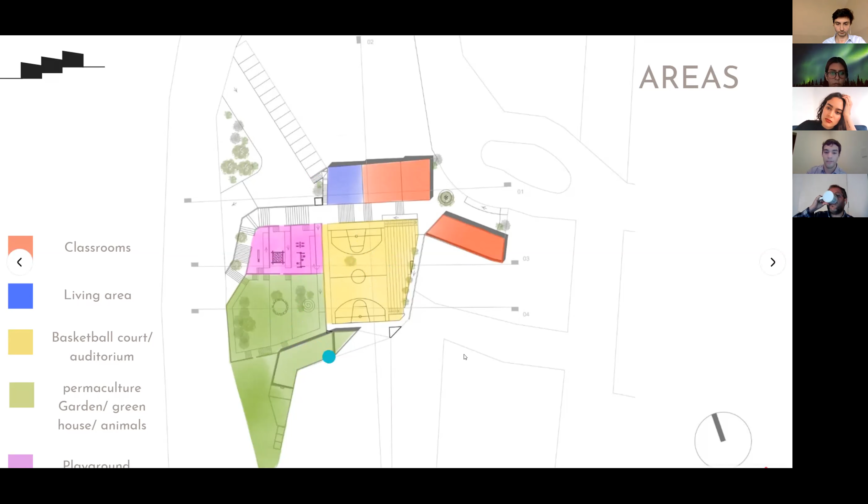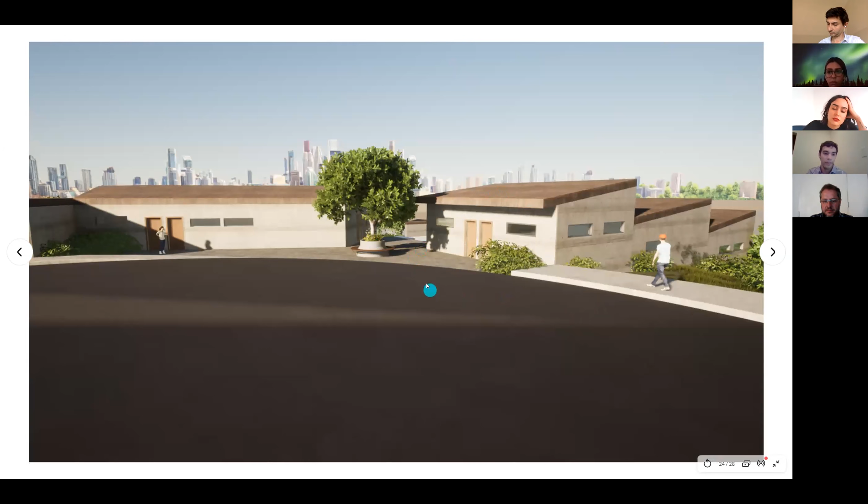And then here we have the renders. What we intended to do is follow the curvature that the street had and continue it into our project, to invite people to come inside. We put these two buildings here and then this tree in the middle to create this kind of passage, so if you're on the street you don't really see the other side of the project or the buildings, and you don't see the city.

So once you cross this passage, then you get all this view. Your view amplifies, so you can see the court or theater place, the stairs, the steps, the garden, the different levels of the project, and also the views of the city.

This is another render from the basketball court. Here we can see the different uses that you could have, also maintaining accessibility, with ramps for people who need them.

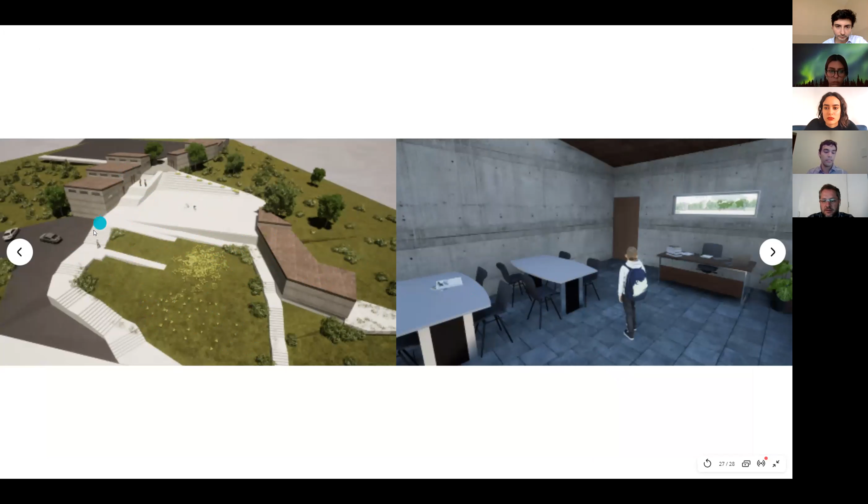Here's a render from the master plan, the whole project, the garden, the steps, the parking lot, and inside one of the classrooms.

So now that you saw the project and the levels it's set on, you can understand why we chose to name it Contrahuella, which in English means stairrise. We did this to respect and follow how the terrain was already laid, and we didn't have to do anything or destroy any of the nature in it.

And that's it. Thank you. Thank you.

Agustin, Giorgio, any comments, questions?

I appreciate the entrance starting from the top, and the system of stairs that is connected with the building.

Maybe a critical point is the facade in the lower part, because I think it's too high, it's too strong. I don't know if we can see in the render, the general render, the height of the building starting from the lower part.

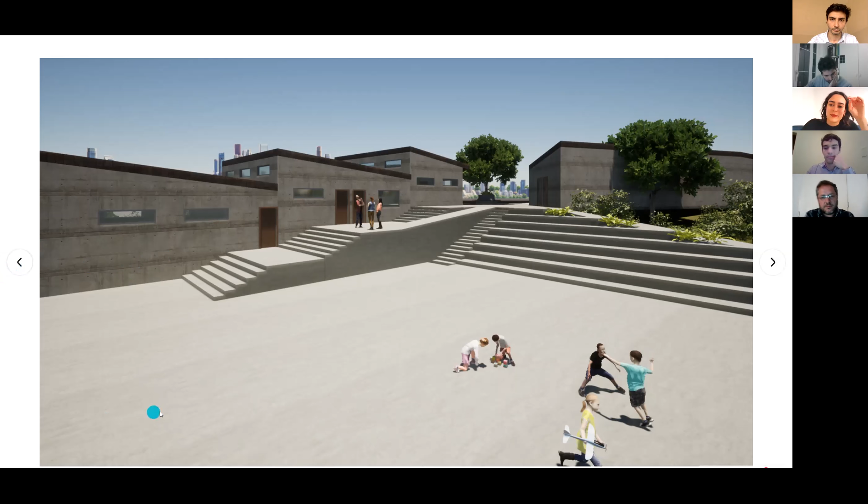Part of why we didn't separate it was because it wasn't necessarily an initial requirement for the project, so we didn't want to make it too big.

Yeah, okay. I mean, normally these kinds of places—I don't know if you plan to have sports competitions—then it makes sense. Otherwise, it's more recreational, just to spend time there playing with small groups of people. But if it's a requirement, it's fine.

This platform can be much nicer if you have a partially green area, and where you have the worst sun in the afternoon, you plant some trees there so it provokes shade where people sit around, something like that. It can be nicer, not so aggressive, not so hard.

Yeah. Thank you. Okay, thank you very much.

So we arrive at the end because all the groups already presented. Now I don't know if Virginia, you want to say something to comment on the project.

Speak in Spanish? Sure. I'm the client. Agustina is Mexican, and Giorgio speaks Italian, French, Spanish, German. Okay, also a little bit of Chinese. Thank you, wow.